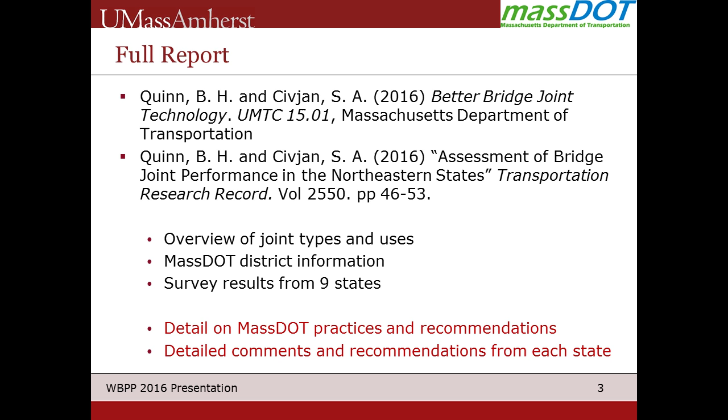So why do we worry about bridge joints? I think everybody in this room knows that if you don't worry about bridge joints, they're going to leak and you're going to get a lot of damage, a lot of corrosion to the superstructure, and corrosion that starts happening in the substructure.

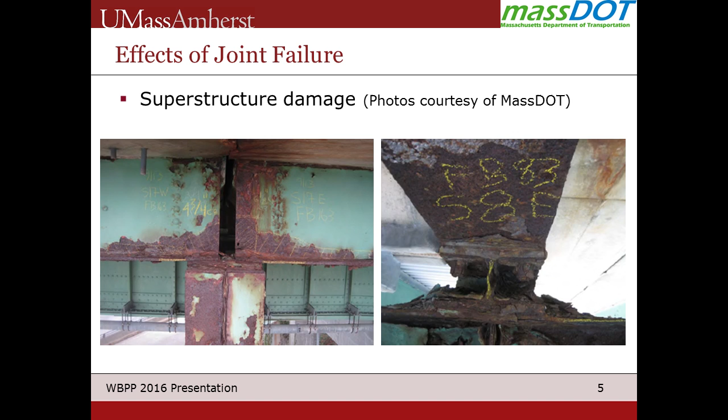And this in the Northeast is not an anomaly. This is a bridge I've driven under that's looked basically like this for the last 10 years, and it is typical of the bridges up and down the interstate system in Western Mass.

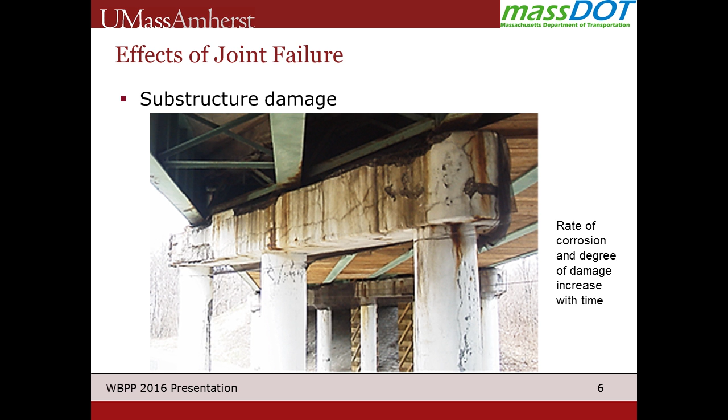The rate of corrosion—one thing to keep in mind is that once they start looking like this, it's not a linear relationship. I've done corrosion studies as well, and once it starts corroding, you start getting the spalling, and it just progressively increases, almost exponentially.

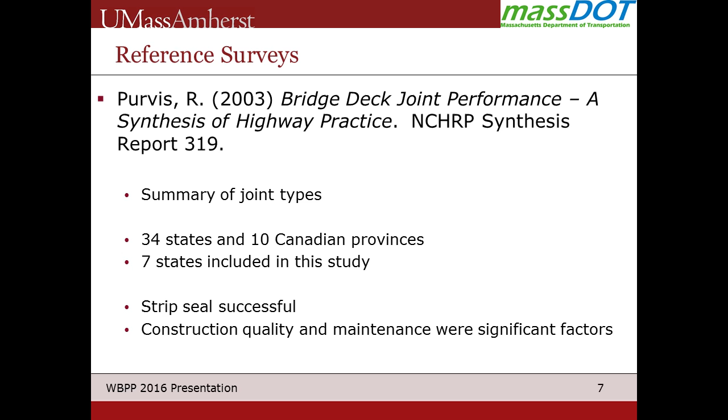There were 2 surveys already out there that we used as a basis to start. One was by Purvis in 2003, an NCHRP synthesis report, which surveyed 34 states and 10 Canadian provinces, including 7 of the states in this study. One finding was that strip seals were fairly successful based on the responses. Importantly, construction quality and maintenance were significant factors, which I think is no surprise to everybody in this room.

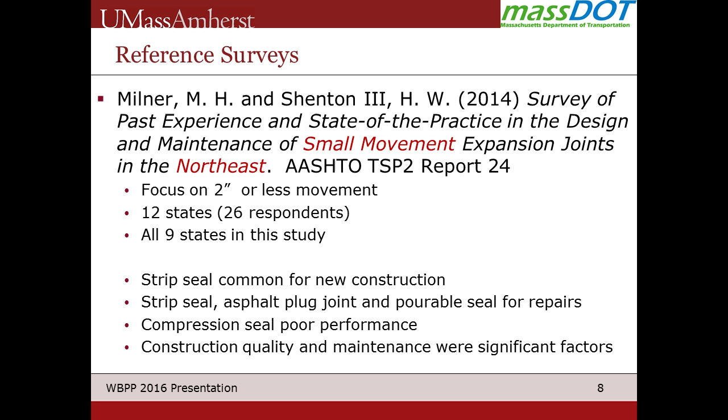Another, more recent survey from 2014 focused on small movement expansion joints—2 inches or less—in the Northeast. This included 12 states, including all 9 states we sent surveys to. They also found strip seals common for new construction and repairs, with asphalt plug joints and pourable seals also common for repair. They noted poor quality in responses for compression seals, and once again, construction quality and maintenance were significant factors in how the joints performed.

Now I'm going to go through, very quickly—which may be redundant to a lot of your backgrounds—just a couple of the joint types to make sure we're talking about the same types. These are the ones that were predominant in the region.

Saw and seal is for very small movements, less than half an inch. You saw cut, then fill it with the sealer.

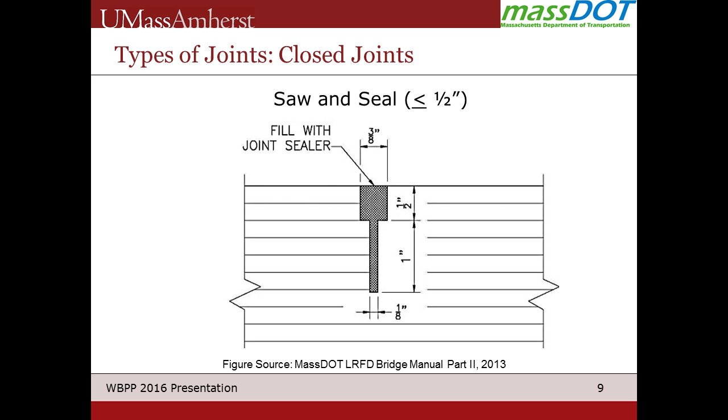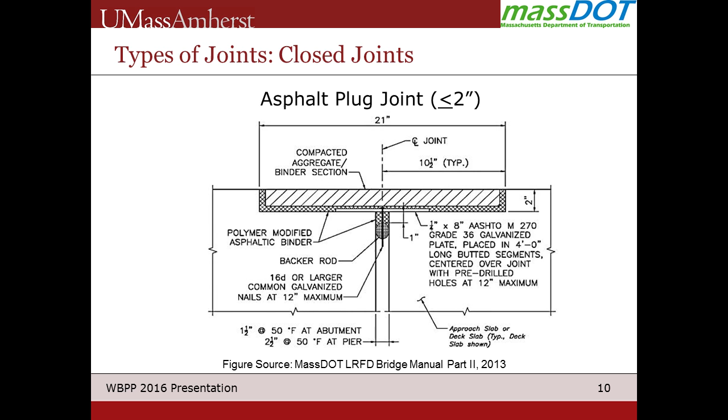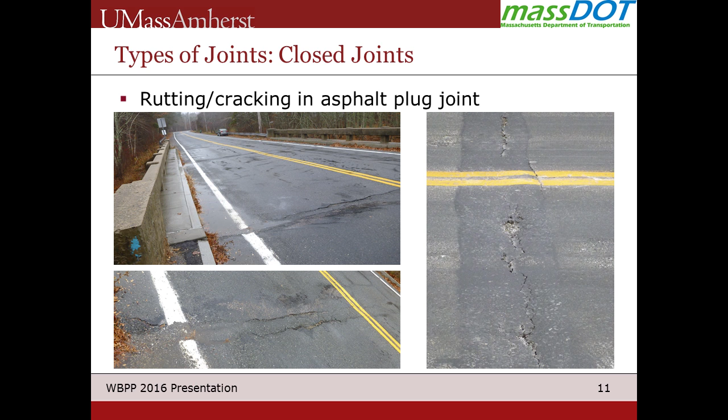Asphalt plug joints are for up to 2 inches, some went to 2.5 or 3 inches. You have the joint with the backer rod, then you put in the plate and the asphalt binder. When these fail, the typical failure is rutting or cracking in the asphalt—a lot of pictures show the binder being pushed out of the joint along with cracking.

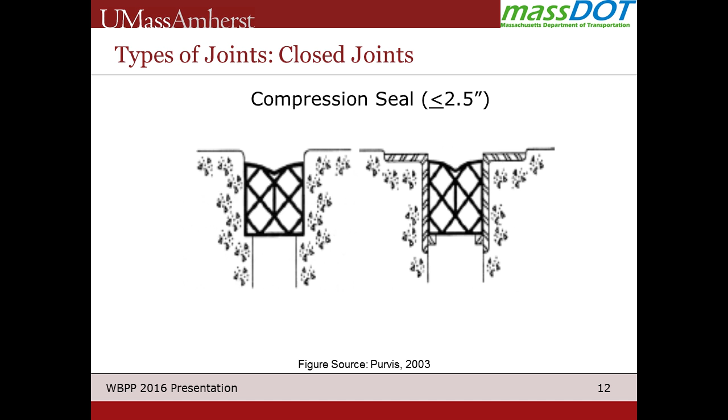Compression seals were pretty predominant in the past, and the question is whether to replace them with something different. The typical failure people were seeing is the joint is there and debris starts building up. This is after the joint has failed, looking underneath at the compression seal that has fallen out with all of the debris.

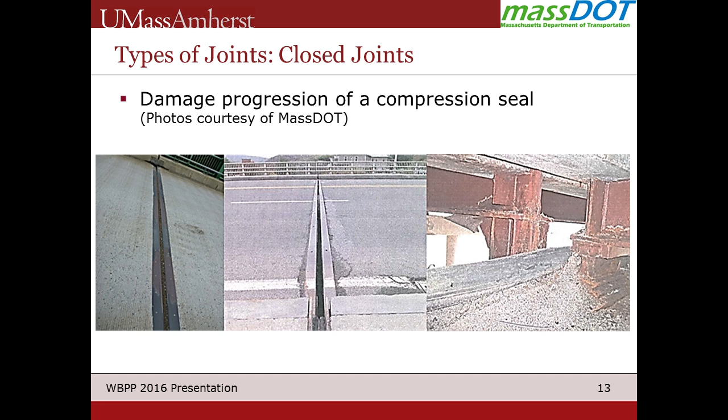As traffic goes over this, the debris builds up. If it's not cleaned out, it keeps pushing it down a little bit more and a little bit more until eventually it can push out the entire joint or portions of the joint.

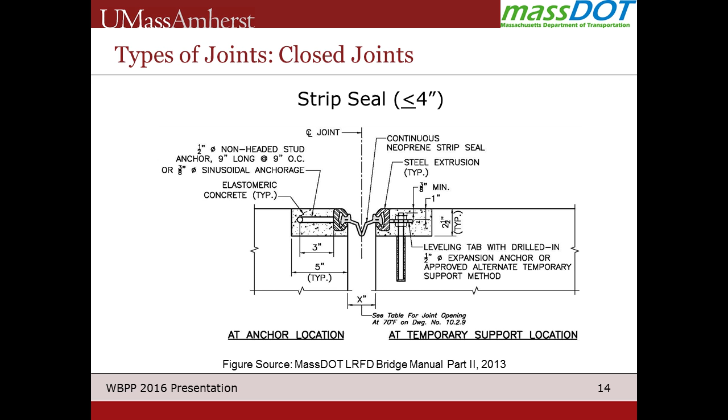Strip seals were a way of fixing a lot of those problems, where you have the steel extrusion with the header and the seal fits into that and goes along. But with time, there are problems with these as well, and here's a failed one. The debris also fills up if it's not cleaned out, and it will eventually abrade or puncture the seal, which is a fairly common failure of this type of joint in our region.

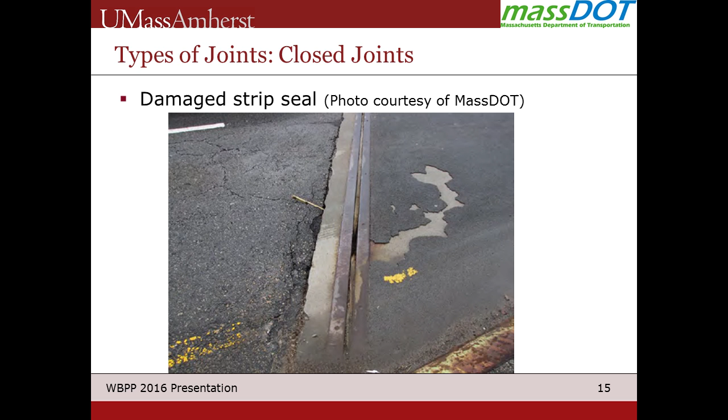EM-SEAL I bring up because it was mentioned by several of the DOTs as a newer product they were using, with significant information on it, and you'll be hearing about this and other ones I'm mentioning later.

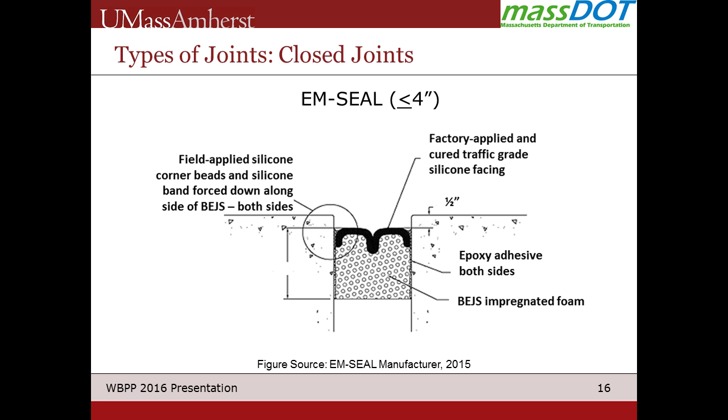It has some foam with a silicone topping and is adhered to the sides of the joint. What was pointed out by Mass DOT in particular, with the districts using it, was that in the areas where they had a lot of problems sealing their joints were at the parapets and curbs. Since it can come in preformed angles sized to the curbs and parapets, they found it much easier to install around those locations and avoided the leakage problems they were having with some other types of joints.

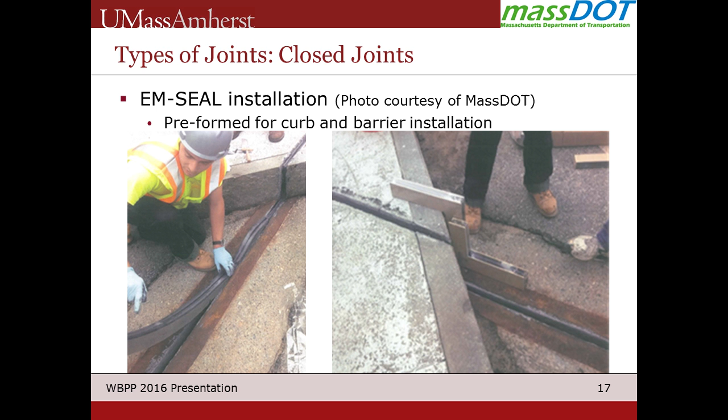A pourable seal for up to 4 inches, and very simple: you put in the backer rod, you pour in the silicone. One issue that comes up is that people don't really think of that backer rod as being important, but it's very important.

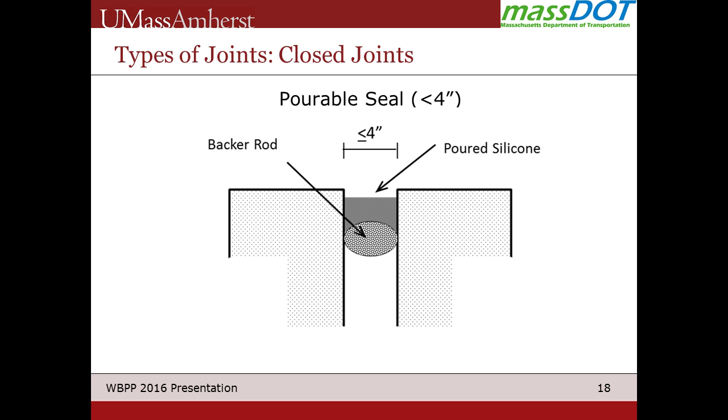The depth of the poured silicone is your bond. So if the backer rod is too shallow, you don't have much bond in there, and what can happen is it just pushes through, similar to the compression seals. This can be localized or along the entire length of the joint.

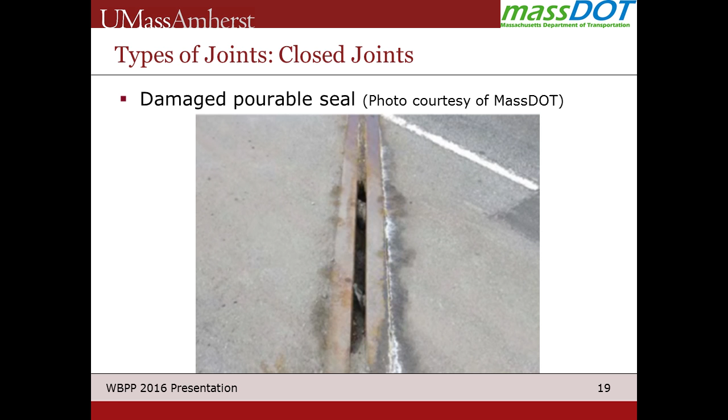When you get into larger movements, greater than 4 inches, we move up to modular joints, and this becomes a complicated system. You're putting in individual seals with support bars and center beams to attach all of this to. Problems that can happen and lead to failure include fracture or cracking in some of the support bars or the center beams.

That often redistributes load and becomes kind of progressive through the joint. Here is one of the failed modular joints in Massachusetts.

So those were all closed joints, meaning we were putting the joint in there to keep moisture or water from seeping through. The other type are open joints.

There's the pure open joint, which is often done as a quick retrofit of a failed compression seal, where they just take it all out and let the water go through, which is a really bad idea and leads to a lot of deterioration.

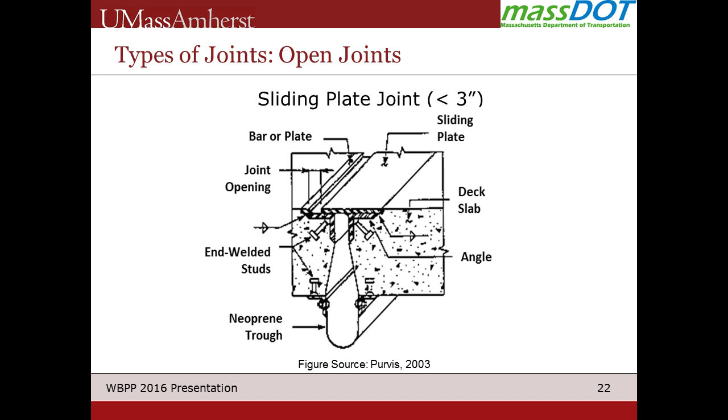Then there are designed open joints, such as a sliding plate joint for less than 3 inches, or for larger movements, the finger joint. In these, you're letting all of the water and salts run through the joint, and the key then is the trough at the bottom. You're collecting all of the water, and the drainage system is the important part to make these work adequately.

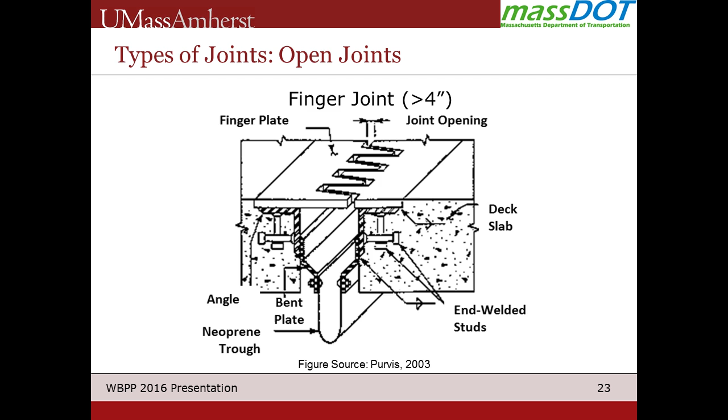So how do these fail? Well, there are two things. This applies to any type of joint, but here's a picture of a finger joint that wasn't installed correctly. This was at 75 degrees Fahrenheit in Massachusetts, a spring or fall day, and the joint is almost entirely closed up at both ends of the bridge, so when it gets to summer, it's going to be bearing up against the sides.

This is a joint that's performing well, only in service 8 to 10 years. But when you look through it, this lighter color is the trough that has torn, and there's a lot of debris if you look down into the joint. That's typical of the joints in this bridge, where almost all of the troughs are torn, just allowing all of the water to go down onto the substructure.

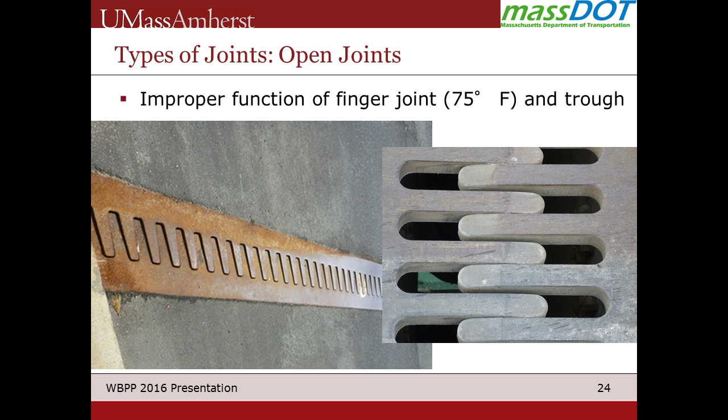So if the joints aren't performing, the options are to go to jointless bridges. Integral abutment and semi-integral bridges are becoming very popular as a bridge of choice for smaller spans in our region. Or for a retrofit or redecking, sometimes they will move to link slabs, where they're essentially putting in a slab over the joint with a sealer.

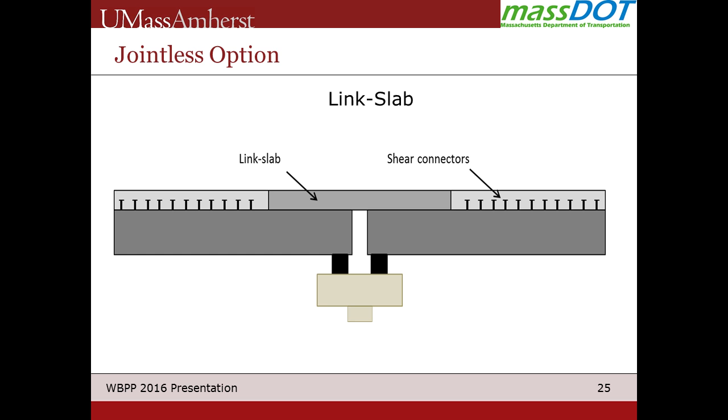So those are the types of joints that were being used. And we went to the different districts. So 6 districts in Mass DOT. We went to all of the districts, had these meetings. And each district has its own characteristics.

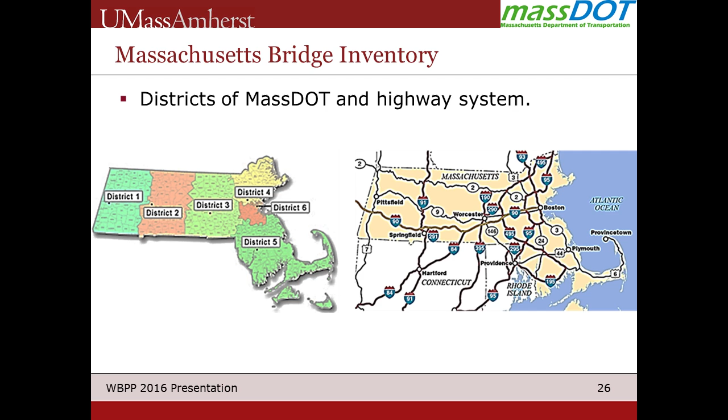District 6 is Boston, very urban, lots of traffic throughout the region. District 1 is out in the Berkshires, mostly rural, smaller span bridges. And then 2, 3, 4, and 5 have their own characteristics. But 2, 3, and 4 tend to have a mix, at least a city in the area, and then a lot of rural areas as well.

When you look at Boston, which is District 6, which has the urban bridges and high volume, most of their bridges are jointed bridges. They also have a lot of older bridge inventory. And then 2, 3, and 4 have a mixture of those.

District 5 was a little bit unusual as well, in that it is dominated by limited access highways with high traffic volumes.

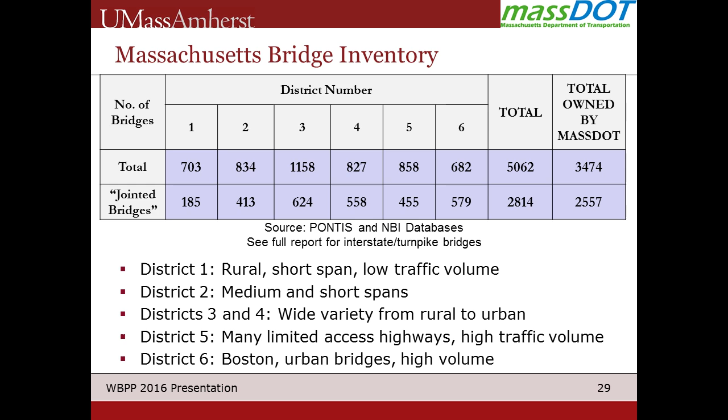So in these discussions, we found, or what kept coming up, is that when they had low volume and shorter spans, lane closures were common. They would shut down the road because they needed to replace or repair a joint.

If they wanted something where they needed high performance concrete for a header, they would shut down the lane for as long as it took to cure, whether that's 7 days or whatever they felt was adequate. In the other areas, District 5 and 6 in particular, high volume limited access highways,

they were looking at that 8 p.m. to 5 a.m. window for work, Monday through Friday, and therefore they were only using quick setting headers. They would acknowledge that those did not perform as well in their experience, but they needed to use them for the construction time period. They also did less surface preparation.

There were joints that required surface preparation, like sandblasting, and they would waive those requirements to meet the construction schedule.

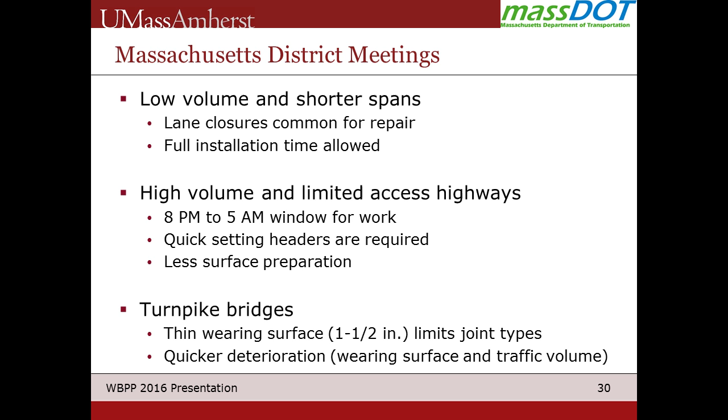There's also a bit of an anomaly in Massachusetts in that the turnpike runs right through the center of the state, and it was under a different jurisdiction when constructed, so it has a completely different, thinner wearing surface. Now that everything is under the same umbrella of Mass DOT, they found there's quicker deterioration of the joints due to the thinner wearing surface and the traffic volumes on the turnpike.

Even though District 6 should not necessarily use them on a high volume road, they use it because of the ease of construction and the quickness of being able to put in those joints.

Another thing is that District 5 has a huge number of asphalt plug joints, even though it also has a lot of high volume roads, because they feel it's something they can come in and... I'm sorry, I said that backwards.

District 6 has a lower number of these. District 5 has a lot because they like them due to the construction time. District 6 and District 2 do not like using them, mostly because of the district bridge engineers' perception of how they've performed in the past, and they've been trying to get rid of the asphalt plug joints.

District 4 has the lowest number of strip seals because they've been phasing them out and putting in more pourable seals, since they feel those are better for the maintenance crews.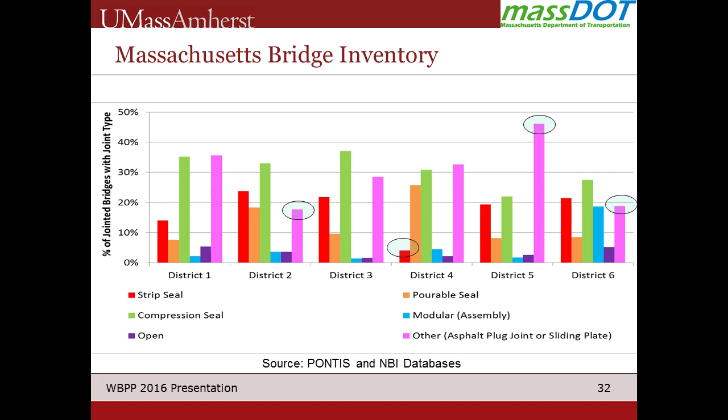In Massachusetts and in many of the other states we were interacting with, new construction was centralized. So if you had new construction, which also included the redecking of bridges, there were central office requirements for what types of joints could be used.

When it went to repairs, it was based on the district, and the district engineers generally made those decisions. The central office would try to impose types of joints, but it was up to the districts, and they often overruled what the central office was recommending. For maintenance, it's also district specific, depending on their maintenance budgets, and they can allocate them however they want. There was wide variation in how they maintain their joints.

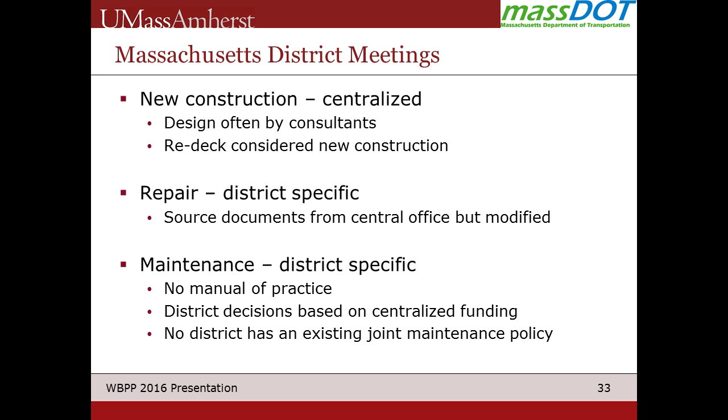There is no existing joint maintenance policy anywhere in Massachusetts at this time. There used to be, but due to budget restraints, they've gotten rid of those.

So what we found was that there was a wide variety of bridge joint types that were used and preferences, just within Massachusetts, and that didn't correspond with the surveys that were sent out before, because in those it was generally one person, and it just so happened to be District 3 that answered the surveys. So it was only through these individual interactions that we found out the subtleties of how different the practice was throughout the state.

We then tried to take the bridge inventory and say, well, is there a correlation between the bridge rating, the joint rating of the condition, and the traffic volume, or the age of the bridge, or the bridge span? We really couldn't find any correlation there.

So we started looking into the actual discussions of why they think specific joints were failing. Some things in the joint selection I didn't mention yet are that installation and inspection practices basically would determine which joints they used sometimes, as well as regional contractor experience.

For instance, rural areas felt that their contractors didn't really trust them to do more complicated joints. So they would go with the simple joint, or the joint that they felt the contractor had experience with, even if they felt it wasn't as good a joint in the long term.

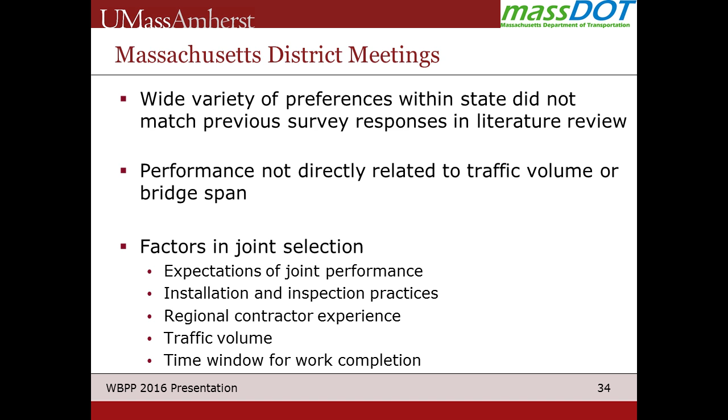So we took that information and worked with MassDOT to come up with a survey to send out to other states. It had 5 different categories and went to 9 different states, which included New England, Pennsylvania, New York, and New Jersey. If you're interested in the full response and more detail on the comments we got back, that's in the final report.

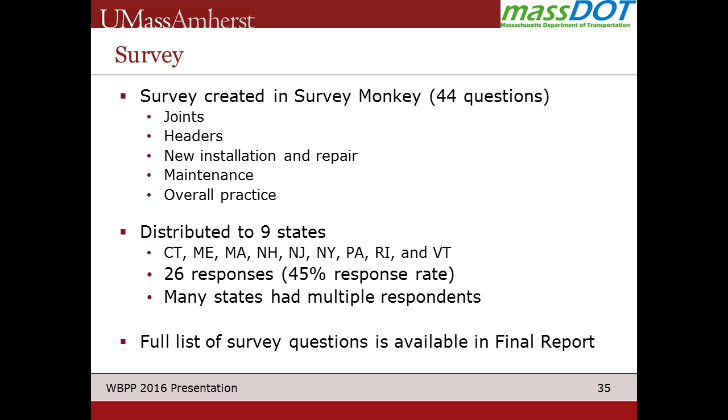Cut to the chase, what did we find out? Well, this probably won't be a surprise, but there was wide variability in the performance, in the preferences, and the service lives of any given joint.

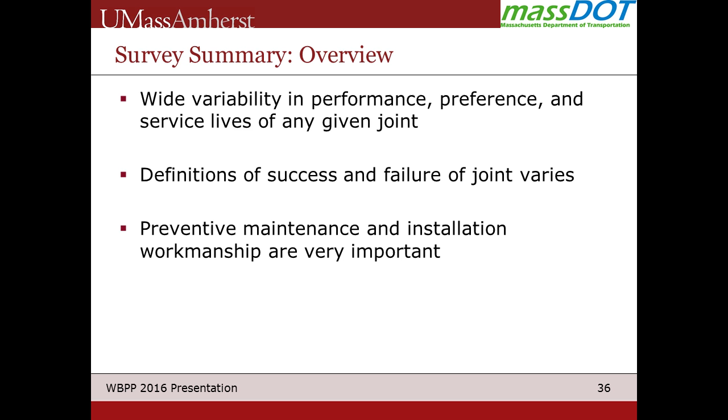The definition of success and failure of a joint varied, and that somewhat surprised me until we started talking to people. Preventive maintenance and installation workmanship are very important, as everybody has pointed out.

So success and failure, how does that vary? Definitions of success were: it should be watertight, require minimal maintenance, and be long-lasting. Definitions of failure: it leaks, needs emergency repairs, has a shorter service life than anticipated, or doesn't provide a smooth riding surface.

So from a survey response, that seemed pretty straightforward. But when we talked to them, we found that their perception of the anticipated service life has a lot to do with how they feel a joint has performed.

Take a joint that you expect to last 15 years. There might be one person who is extremely happy with that joint because it lasted 10 years before they started seeing a little bit of leaking, and they knew that, yep, in 15 years I've got 5 years to start putting it on my construction projects and get that fixed. They were happy with that reduced performance at the end of the life of the joint.

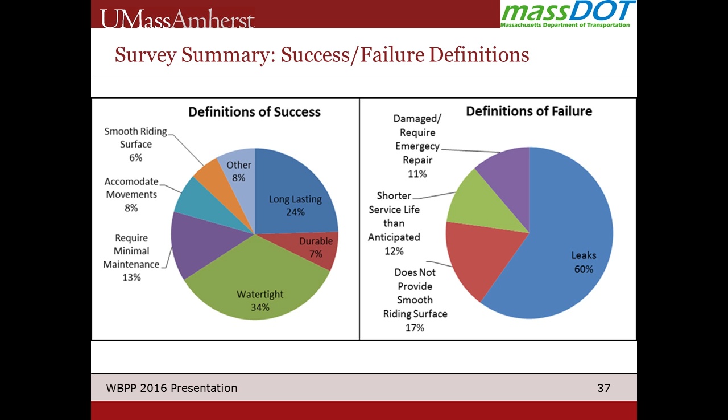There would be somebody else who would say, it's supposed to last 15 years, and at 10 years it was leaking. That's a failed joint, and that's not what I'm expecting.

So that led into trying to explain these results, where along the horizontal axis are just the different types of joints. The vertical axis is the rating, where 1 is an absolute failure and 5 is an absolute success. The darker bars are the average response from all the states.

From this, we can see that the link slab everybody rated as almost an absolute success. This is the bounds, so the lighter bars are the bounds of individual responses, and everybody thought that was quite good.

For an open joint, water just pours through it, so yes, it should be an absolute failure as a joint. But then you come to something like a compression seal that had a fairly good rating, good to very good, but individual responses ranged from very poor to an absolute success. Almost everything, somebody thought was an absolute success, and almost everything, somebody thought was an absolute failure or close to it.

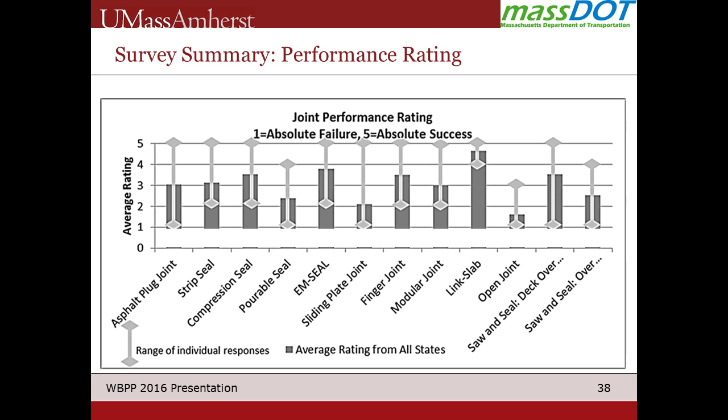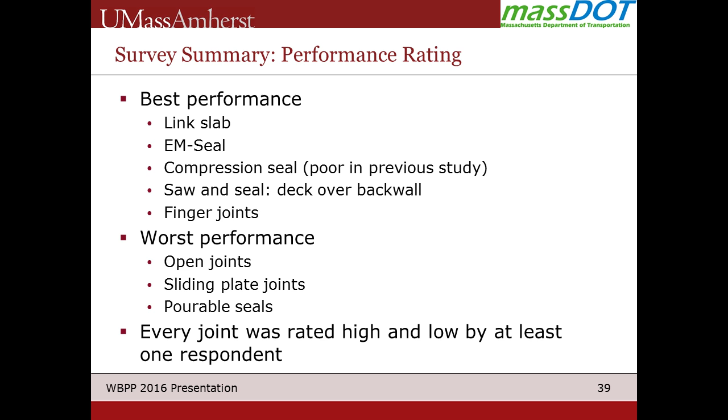If you went just by the averages, you would say these joints - link slab, EM-Seal, compression seals, saw and seal, and finger joints - perform pretty well, and the worst were the open joints, sliding plate joints, and pourable seals. But as I mentioned, there were high and low ratings for every type of joint.

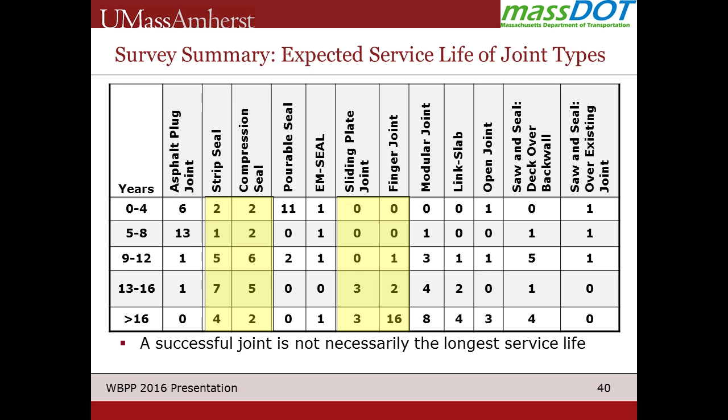Some of them, such as sliding plate and finger joints, were expected to last quite a long time. Some, such as pourable seals and asphalt plug joints, were expected to not last as long. If you look at the two, asphalt plug joints and pourable seals, which had the shortest life...

The advantages of these are that they have quicker installation and repair. You can splice parts of them instead of replacing the entire seal, and they're relatively inexpensive. So even though the central group in Massachusetts might be trying to get rid of some of these, the maintenance crews in the districts love these joints. This was what they felt they could maintain without having to go out to bid - they could just do it themselves for a lot of the joints. So they have an advantage even though they might not show up as being a great joint, or they're great at what they're intended to be, and that's the thing to keep in mind.

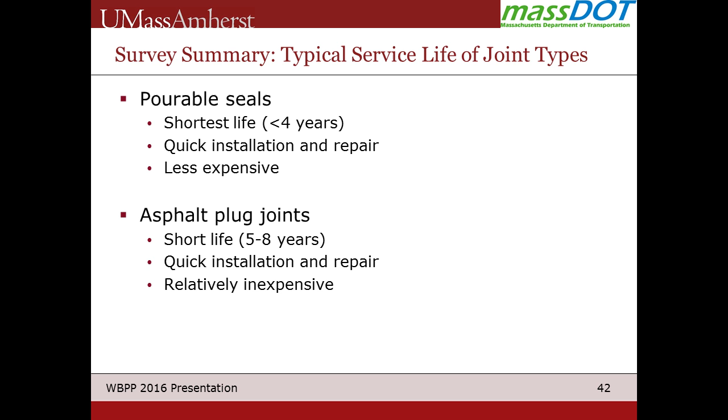We also had a question - this bar is not necessarily important for the exact numbers, but we asked: if you had routine repair and maintenance, which joints do you think would perform adequately? This is just the number of people that checked it off. If they didn't have experience with that type of joint, they wouldn't check it. But essentially every type of joint somebody checked, usually quite a few people checked that yeah, if we maintained it, it would perform pretty well.

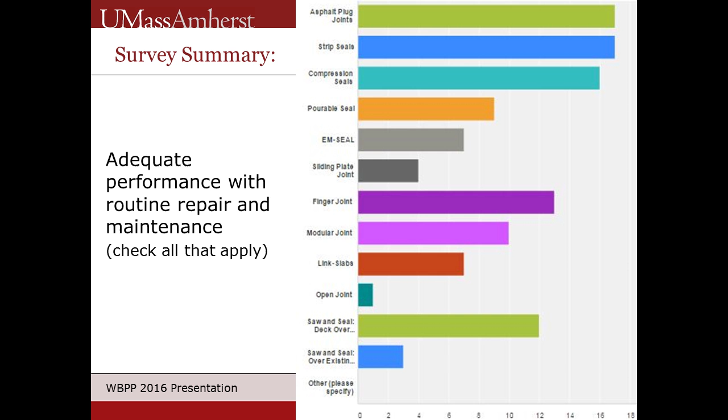They were trying to strike a balance of something that they didn't really have to do much maintenance on, because they didn't have the budget for that. So these are some of the ones that, with good maintenance - asphalt plug joints, strip seals, compression seals - might have shown up on the same person's survey. They might have said, oh, this is an absolute failure, but then they would rate it as fairly high if it had good or adequate maintenance.

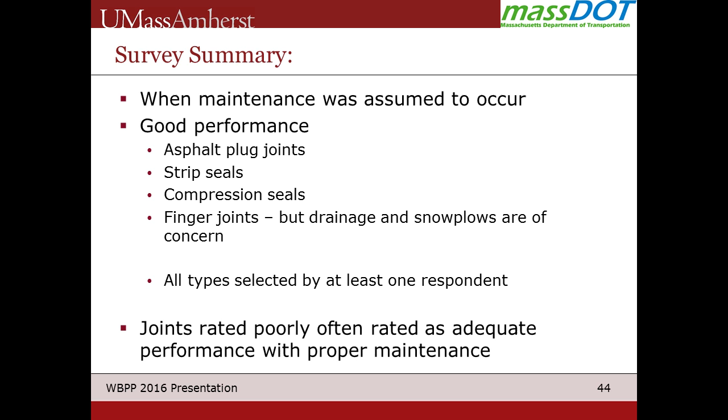We also asked them to rate the importance of different factors to joint life. The one that came across as everybody ranking really highly was installation workmanship. Inspection, joint type, and maintenance practices all ended up with at least somebody rating them really high. Weather conditions and header type were other things we asked about.

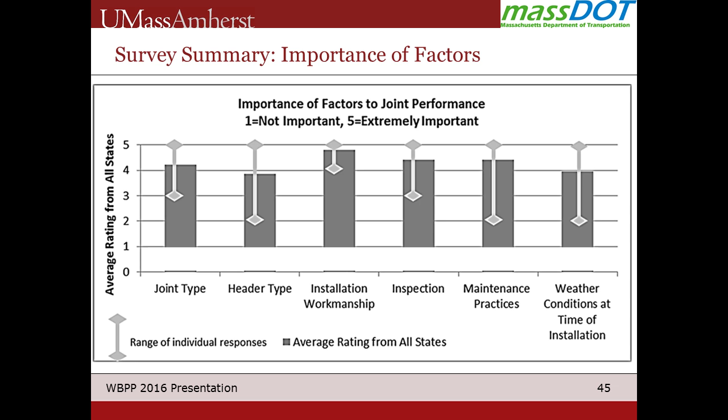Now I'd like to tell you about some comments or recurring themes with the headers, which I'm not going into too much in this talk, but that was quite a bit of the survey. If the old concrete needs to be taken out for replacement of a joint, it needs to be removed to sound material. It came across again and again that where sound material is difficult to assess, it was usually left to the contractor to determine whether they got to sound concrete. That can be a very different number if it's a bid on volume or a bid on the project.

It came up several times that 2 feet minimum on either side of the joint should be removed, but that wasn't always done. Applying headers to dry materials, or moist if it's supposed to be moist, is important, but wasn't always followed.

Those that used quick setting concrete or elastomeric headers typically said they didn't feel they were as durable, but that they were what they needed because of overnight or shortened construction periods. They're always looking for more durable products, but they use many of the products that are out there.

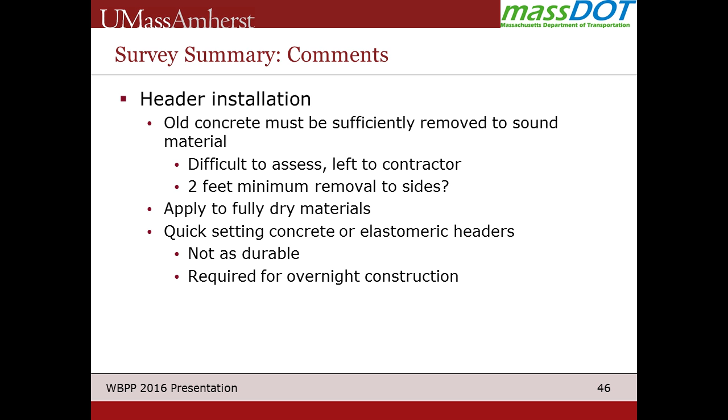Some things that would negatively impact joint performance include improper cleaning of the joint surfaces and substrate. It was noted that for quick construction, sandblasting was often skipped, even though they knew it would deteriorate the joint more quickly.

Incorrect opening sizes or placement of the seals - maybe incorrect temperature, or the joint itself is the wrong size for the temperature you're expecting to place the seal at. Also, bonding agent being applied at the wrong time, or application on damp surfaces.

If you have a joint type that requires bond breaker tape, which a couple recommend, it was often not put in, so the silicone would just rip apart in the center rather than separating. That's usually on the saw and seal. One state mentioned that phased construction projects had joints that performed more poorly than when they replaced the entire joint.

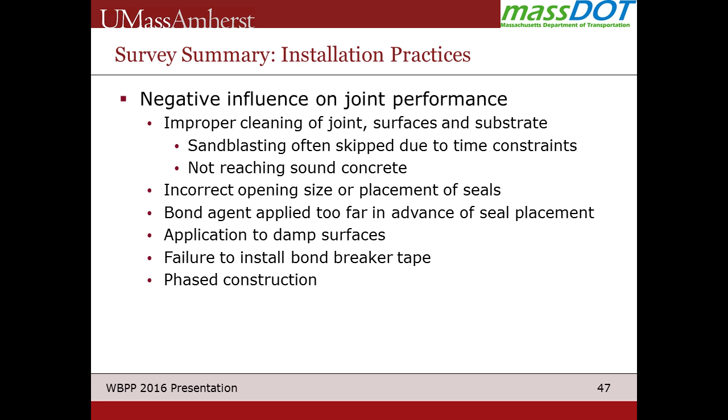For specific joint types, the saw and seal - these are such small movement joints that people don't think they're that important from the contractor and inspection point of view, but you need to put the saw cut at the right location. If the saw cut is supposed to be above an existing joint and an overlay is placed, the contractor will guess where it should go, so it needs to be marked before the overlay is there. If they don't, the deck will crack where the saw cut should have been.

Asphalt plug joints generally don't perform as well with high traffic volumes. Many manufacturers don't recommend them for that situation, yet they were used anyway, with people saying they really don't hold up the way they want them to. The backer rod was important in those.

Compression seals are sometimes incorrectly sized and therefore don't stay in compression. Pourable seals require the surface to be completely clean and dry. The location of the backer rod is actually important, and a lot of people didn't realize that. The anchorage of the armored headers was known to be a problem and caused issues with sliding plate joints.

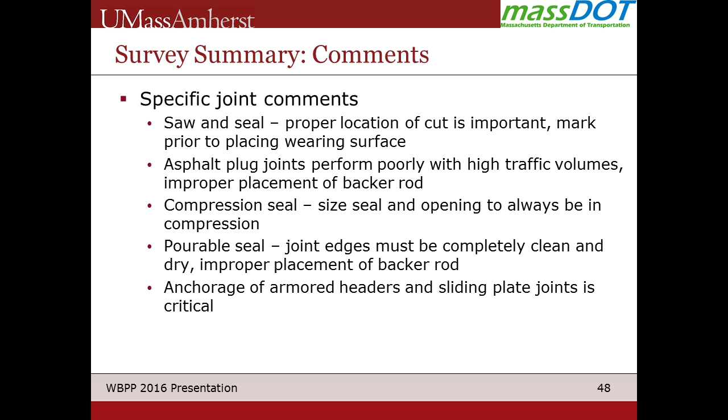Some new products were mentioned, which you'll hear about later. EM-Seal was mentioned for that detail in particular on the parapets and curbs. For asphalt plug joints, many of those happier with their performance tended to use pre-bagged materials, since otherwise there could be fluctuation in performance if mixed on site.

Several states and districts were combining approaches, almost a belt and suspenders method, using a strip seal or EM-Seal with the asphalt plug joint on top. Other products mentioned were Silicoflex or the inverted V, called a V-Seal system - they hadn't used it much, just implementing it, but were very happy with it so far.

One state was using concrete troughs with finger joints behind the abutments, running all the moisture off the bridge. Another state, I believe Maine, was looking at these armored headers and thought the problems were just with the armoring being too small. They were looking at much heavier angles and anchorage and seemed very happy with the results.

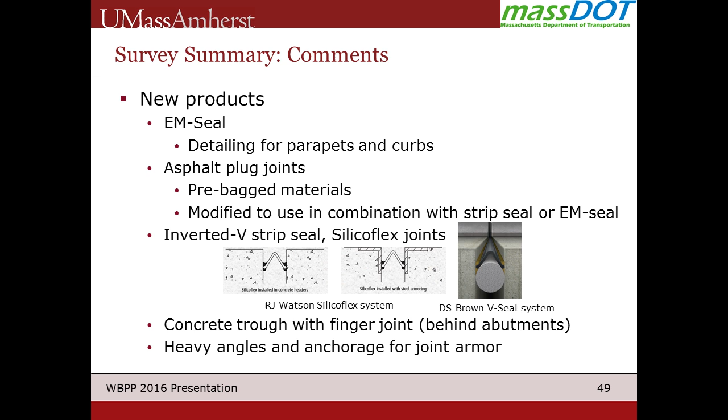A couple of things came up that I was maybe not surprised by, but everybody talks about how important these are, yet they're not necessarily done - the watertight testing of new joints. Only 3 of the 9 states surveyed did any water tightness testing, ponding water to see if the joint leaks after construction. Nobody did that on repairs.

Warranting joints is almost impossible. What happens, at least in the Northeast, is that if a joint is leaking shortly after construction, the contractor says there must have been something wrong with the joint. The manufacturer says it was installed improperly, and everybody looks at the DOT, saying you called out what joint to use and you were the ones inspecting. So where does the blame lie? Even when there were blatant problems and the manufacturer knew what was wrong, they could rarely get a contractor to come out and replace it. They'd gotten into the routine of just bringing somebody out to repair it on a different contract.

Maintenance is extremely important, but only 5 of the 9 states actively did that, and even those that did said it wasn't adequate or up to the standards they'd like, invariably due to funding issues. The key is that investment in your joints saves all the substructure and superstructure damage that follows, and that comes down to funding. It's limited for maintenance and preservation, and we really need to think about it.

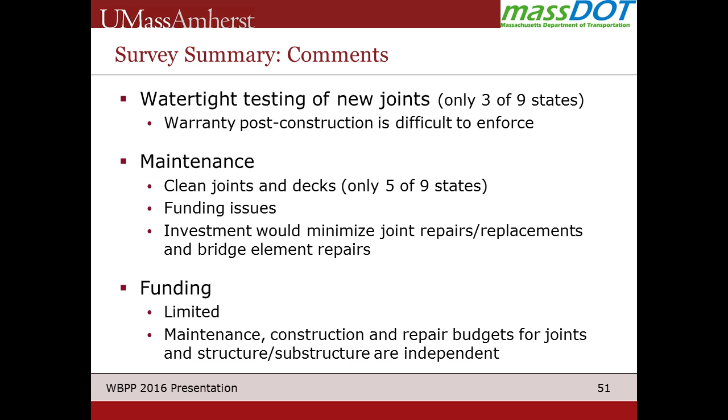So some overall conclusions, or recommendations, came out of the project. These joints are really important, I think everybody agrees on that. But if they're not addressed in a pre-construction meeting, discussing joint installation and expected performance, they end up being thought of as an afterthought a lot of times.

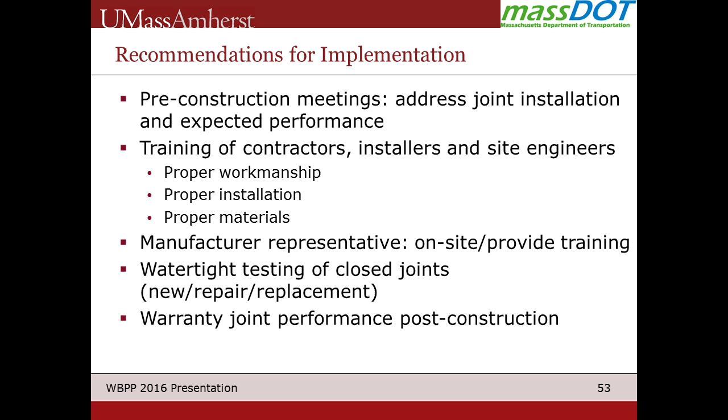Training of contractors, installers, and site engineers on proper workmanship, installation, and materials is really important. Almost all the DOTs, especially at the district level, kept saying they just didn't have the time or personnel to do that training properly. Manufacturer representatives are there to run workshops and help with this, but are rarely used. They were rarely on site at any of the DOTs unless it was a new contractor installing that type of joint for the first time, even if the specs called out that they should have been there.

Watertight testing, as I mentioned—even in a repair, you're not trying to assign blame if it's still leaking after the repair, but you'd like to know it's still leaking so you can stay out there and keep repairing it until it's fixed. A lot of times it was just a replacement contract, and later in inspections they'd say, oh yeah, there's leakage and continuing damage here, without really checking the joint as it was installed.

Preventive maintenance is extremely important, and I really don't think that can happen without tying these budgets together and really thinking about those life cycle costs.

Some research areas to think about, as far as information to keep track of in databases: evaluating repair and replacement methods and contracting between states and between districts to see what are the best practices—it was very ad hoc in how people put together the contracts. Also measuring installation tolerances—everybody says it wasn't installed correctly, but nobody's actually got the data to show, at least in our region, what tolerances are not being met and what damage results from tolerances outside manufacturer recommendations. Header performance under different types of loads, and coming up with test materials and test methods to approve those header materials, is lacking in our region.